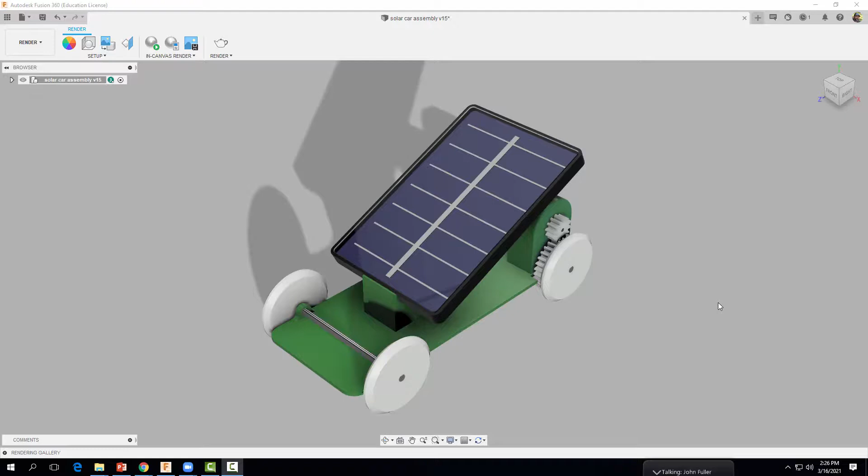Hey everyone, welcome back. In this video, we're going to learn how to design the solar panel that sits on top of our solar car. So let's go ahead and get started.

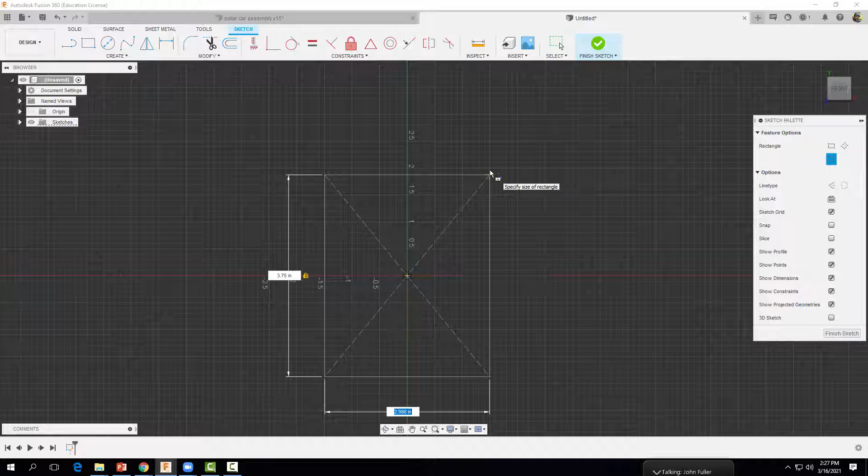Let's come on up to File and let's start a new design. Let's go ahead and start a sketch here on our XY plane. Come on up to Create, and we're going to grab our center rectangle. Start here at the origin and drag out a rectangle that is roughly 3.75 inches by 2.5 inches. Select Enter. Let's go ahead and finish our sketch. We're going to extrude this guy out a distance of 1/4 inch, 0.25 inches.

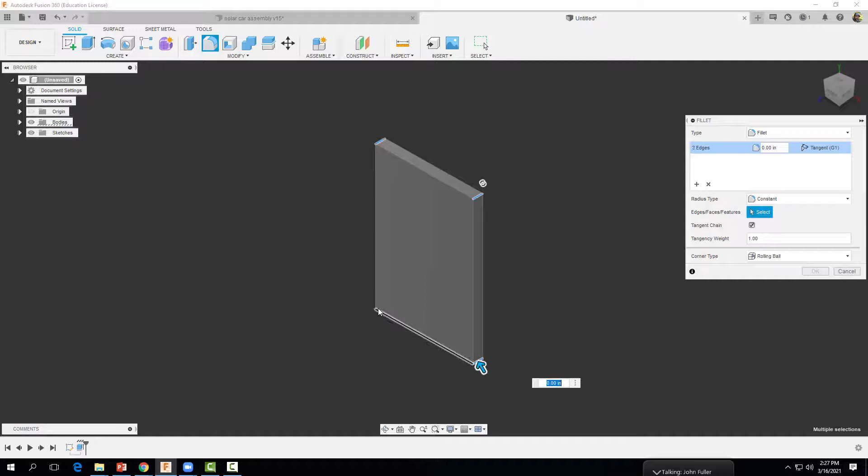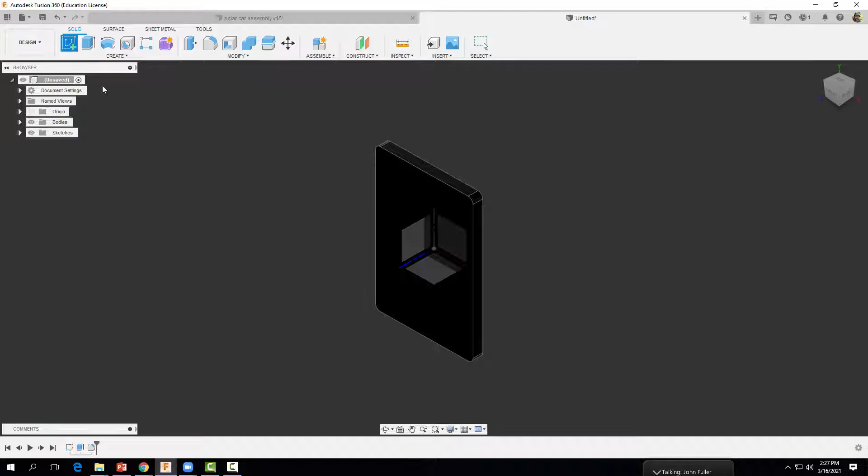Select OK. Now let's go ahead and add some fillets on these corners. One there, one there, one there, and one there. And we want those fillets to be 1/8 of an inch, 0.125. Select Enter. Okay. Now before we proceed, I'm going to give this guy a nice glossy black appearance. Okay. Select Close.

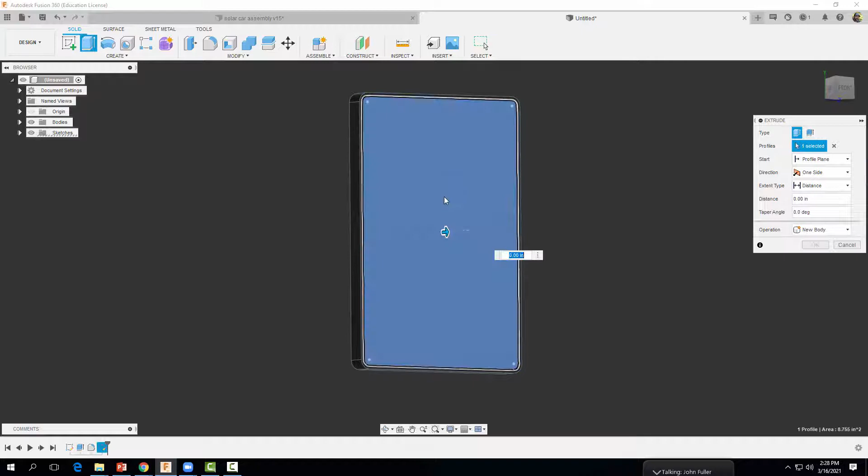Alright, now I'm going to start a sketch here on this surface. I'm going to zoom in a bit, and we're going to offset this outer edge a distance inward of minus 0.05. Enter. Okay. And then let's finish our sketch again. We're going to extrude, but this time we're going to cut away this inner portion, and we're going to go the other way, a distance of minus 0.11.

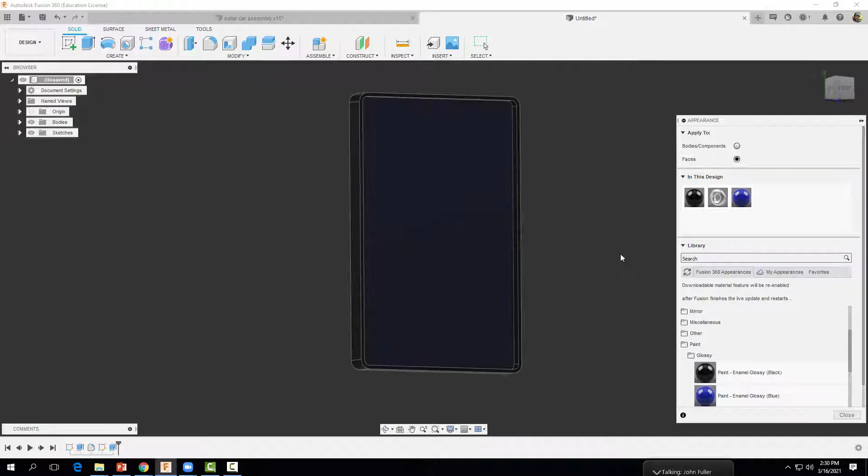Select Enter. Now we're going to come up to Modify, and we're going to make this inside face right here a nice dark blue color. So we're going to come over to Appearance. Make sure you select Faces now right here, and then we're going to drag the blue color to this face. Okay, so now we have this dark blue color on the inside of our solar panel. Let's go ahead and hit Close.

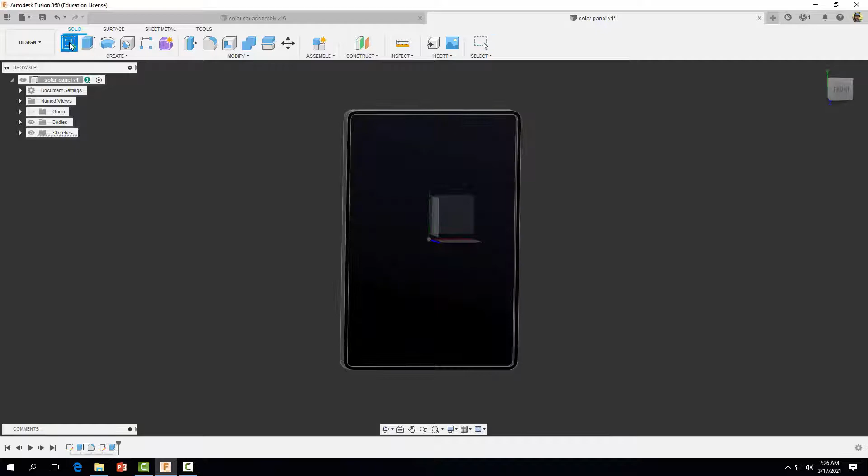Alright, so now we're going to draw some of the inner workings of our solar panel. And keep in mind, we're just doing something very simple. We're just trying to make it look somewhat like the original solar panel as best we can without going into too much detail. So we're going to start a sketch here. I'm going to zoom in and grab my rectangle tool, and somewhere in this area, draw out a really small rectangle that looks something like that.

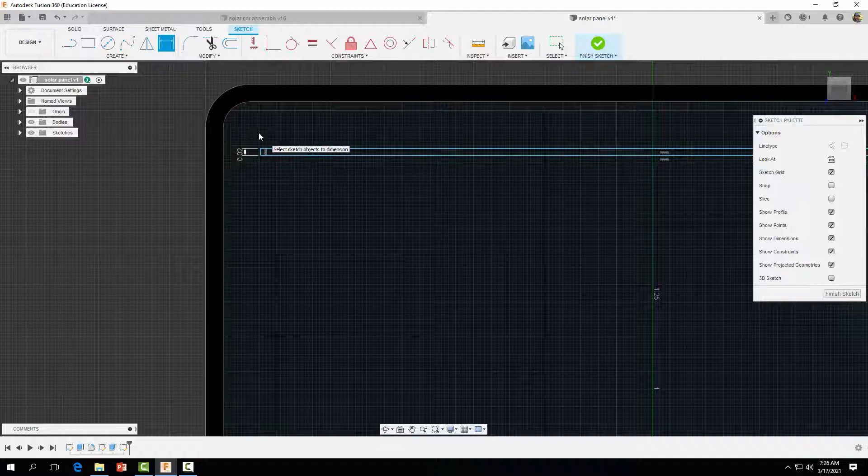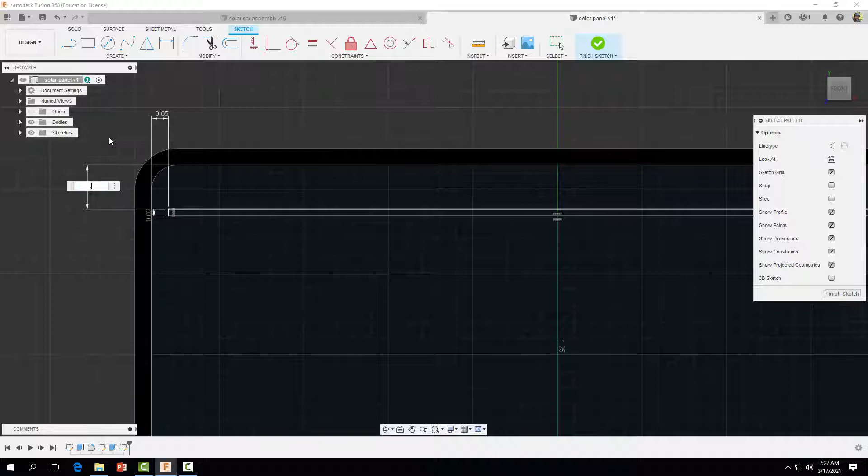I'm going to zoom in, and I want this dimension to be 0.02. This dimension to be the same thing, 0.02. Okay, and then I'm going to dimension it from the edge here, and I want that to be 0.05. Same thing on this side, 0.05. And then from the top here, let's go with 0.1. Enter. Okay, and then let's hit Escape.

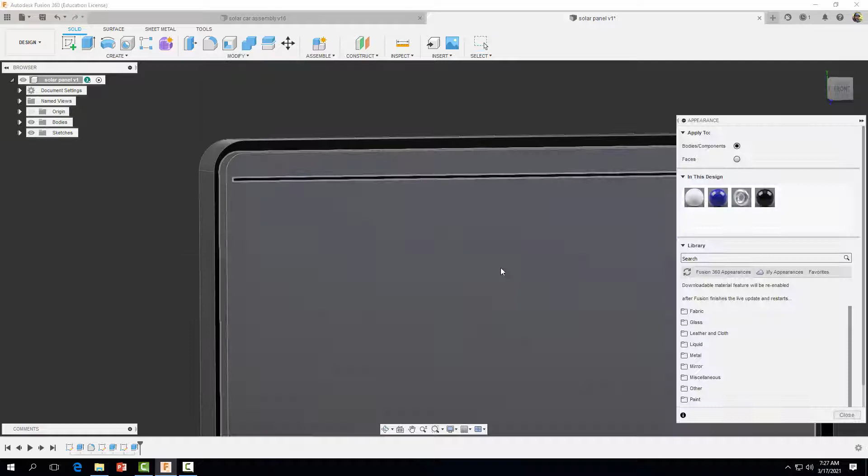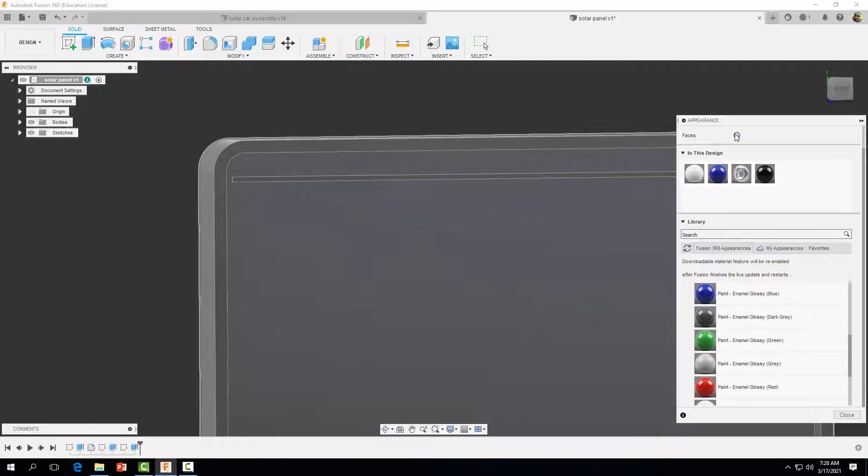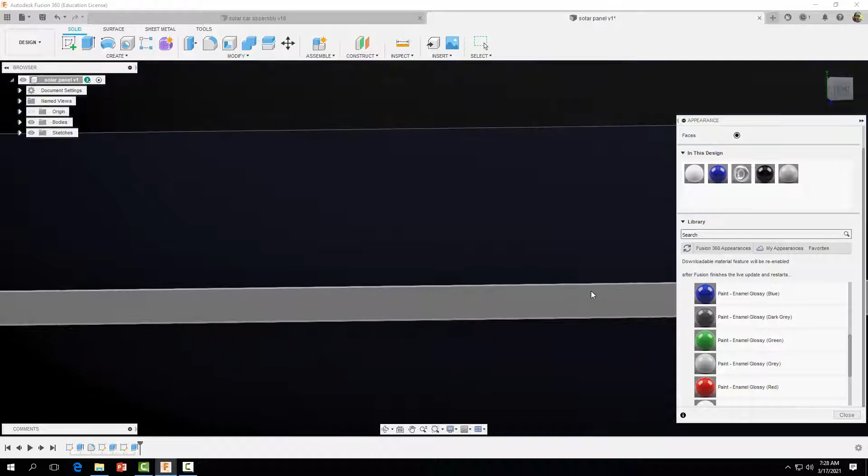We're going to finish our sketch, and we are going to extrude this guy out a very small distance, 0.01. Enter. Okay, and then we're going to come over to Modify. We're going to give it an appearance, and paint it just another glossy white color. Let's click on Faces. Whoops. Let me zoom in here. Zoom in even further. There we go. Hit Close.

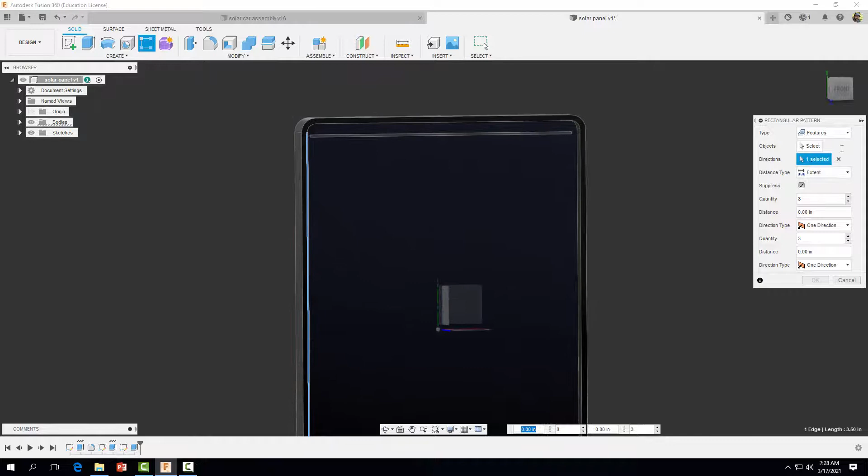And now we want to come over to Create, and instead of making like 8 of these, we're just going to use what's known as a rectangular pattern. So we're going to come to Features, and then select the direction we want this pattern to go. I'm going to click on that line right there, and I want like 8 of them. And I forgot to select our feature there. Now once we do that, we can drag them down so we get something that looks like that. Just kind of eyeballing it. Okay.

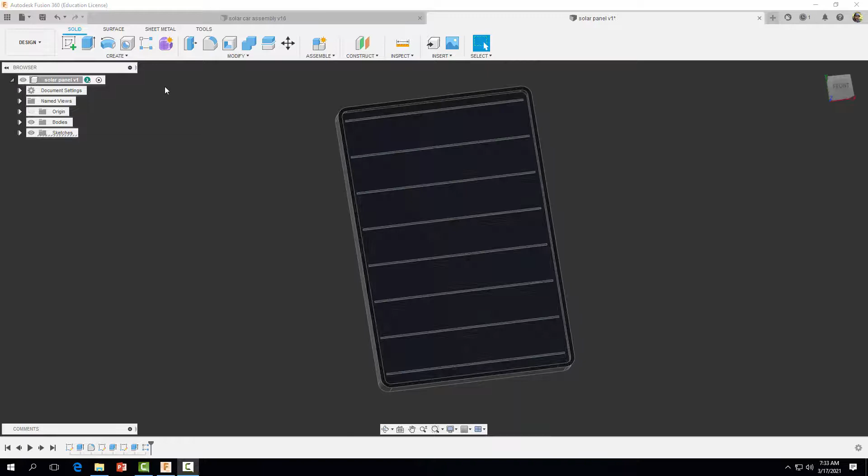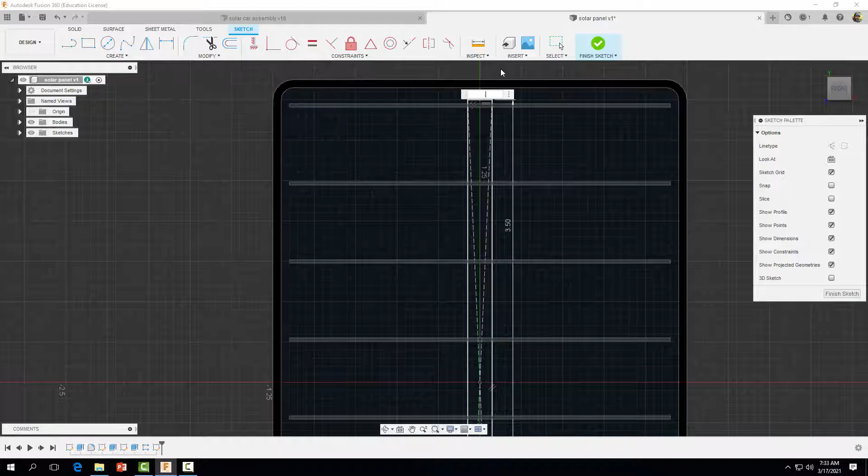Now we're going to make one more feature that runs perpendicular to all these lines. So pretty much similar to what we just made, but perpendicular to it. So we're going to grab our center rectangle tool this time, start at our origin, and drag out a rectangle, something that looks like that. Let's dimension this side to be 3.5, and then dimension the thickness of our rectangle to be, let's go with 0.08, enter.

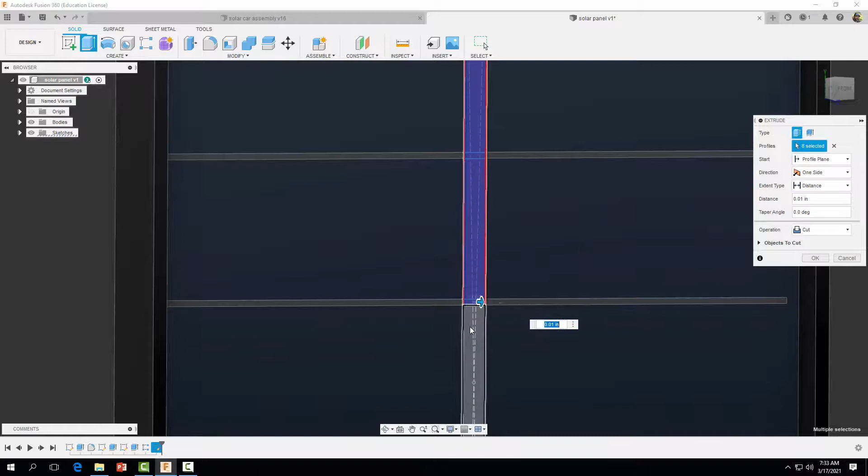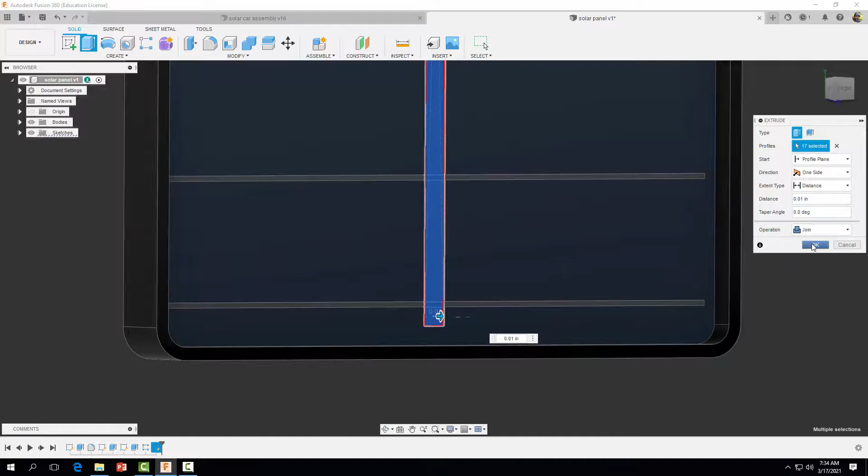Okay, and then let's finish our sketch and extrude this guy out the same distance as our other features. Now here's where it gets a little tricky. Zoom in, click there, click there, click there, there, and there, and just do that all the way down. And we're going to make that distance 0.01. And make sure over here it says join. Very important. Select OK. Okay, looks pretty good.

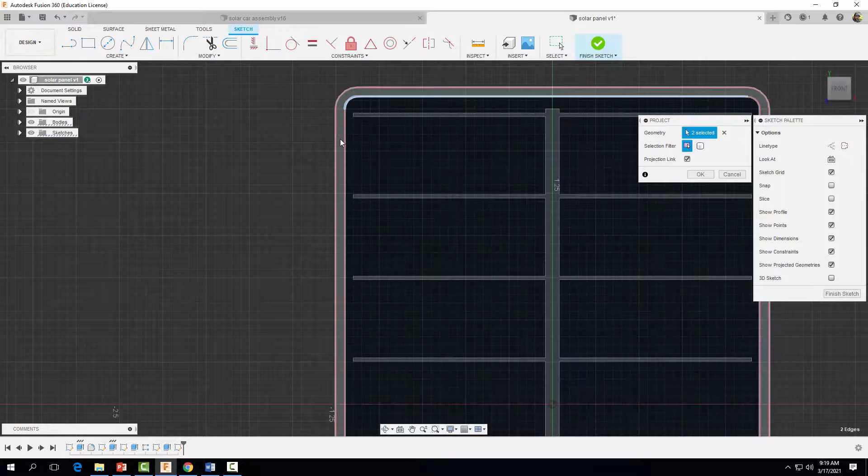So the last thing we want to do now is to make a plastic transparent, or see-through, cover for our solar panel. So to do that, let's start a sketch right on this surface right there. Okay, and then we're going to center it sort of like so. Come over to Create, come down to Project Geometry. So we're going to project our lines here, and I'm just going to start clicking on these outside perimeter lines. Be careful, so you don't have to do it again. Click there, there, and then this final line, select OK. All right, and then let's finish our sketch.

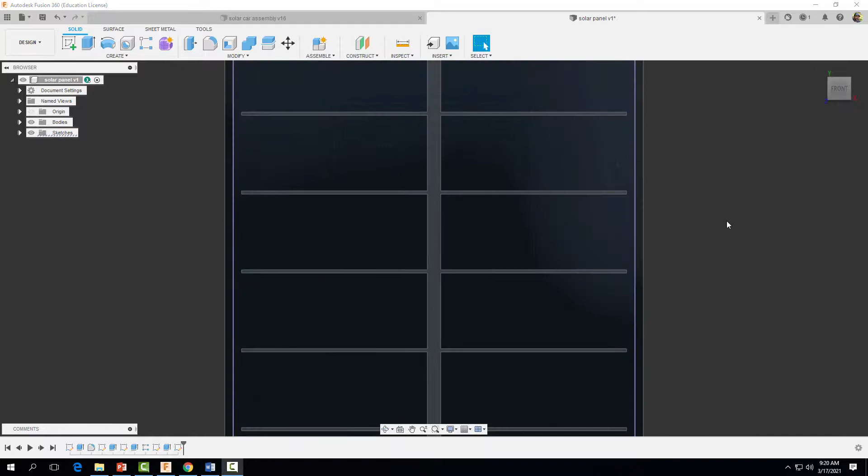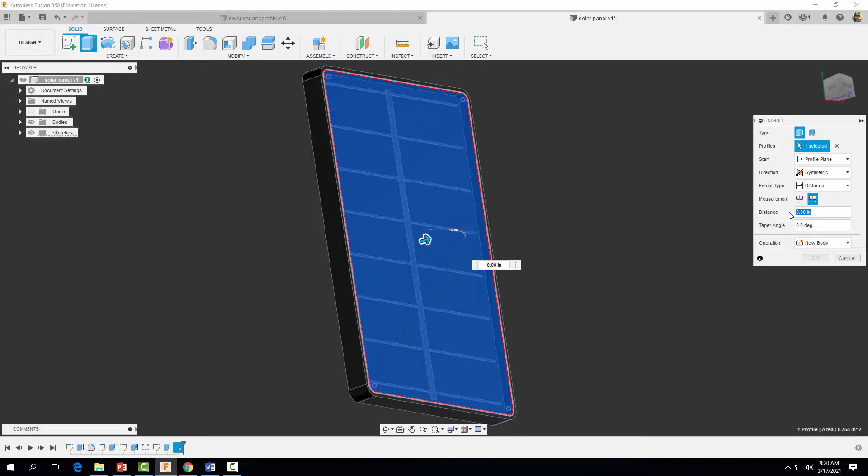I'm going to zoom out here, and we are going to now extrude this guy in a direction that is symmetrical, so both in and out. We've got to select that face and then specify our distance of 0.0625. And make sure it says new body. Go ahead and select OK. And now you're like, oh, we got a lid on there, and now we can't see our solar panel, and that's okay. We're going to make this material clear or transparent.

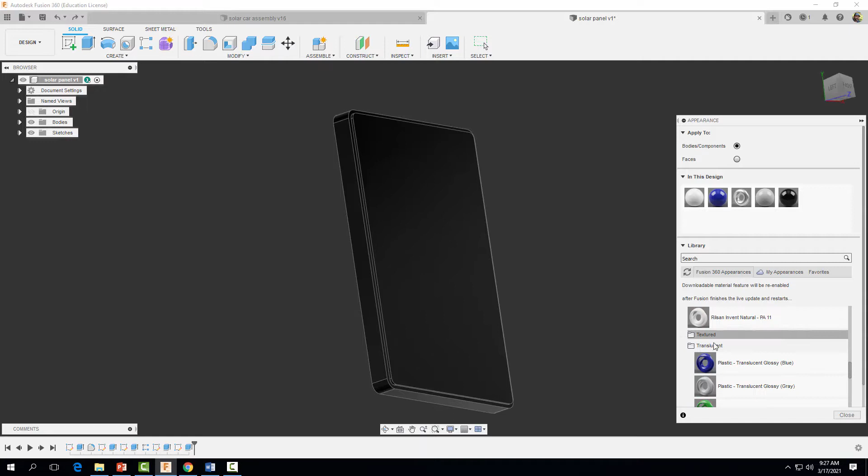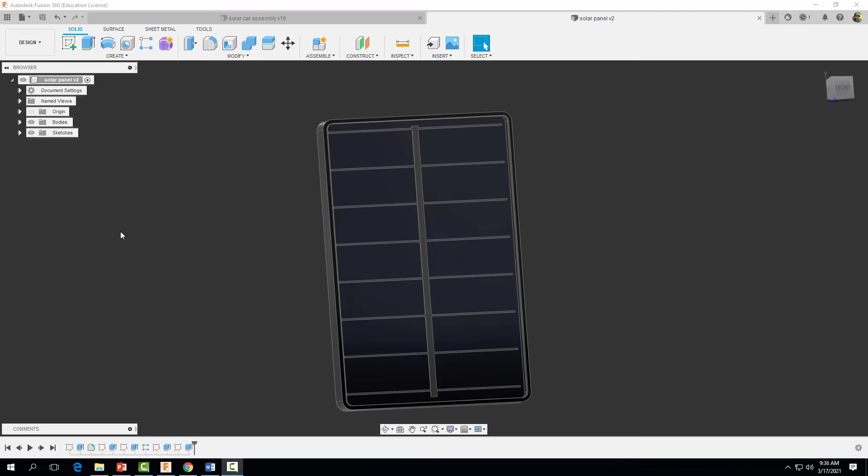So to do this, let's come up to Modify. We're going to go to Appearance. Find plastic, and then scroll down to where it says translucent and find acrylic clear. Click on the face, drag it to that face, and there you go. Select Close, and now we can see through our clear surface here. All right, I'm going to save this guy. Don't forget to save it. And after you've saved it, that'll do it for this part.